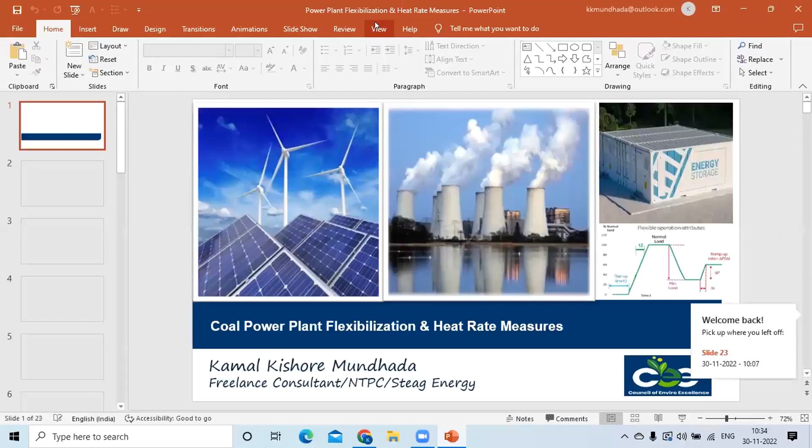Once again, good morning to all my colleagues. As Mr. Prabhat Vermaji rightly pointed out, India's power scenario, particularly the power generating company scenario, is at the cusp of transformation. We have a commitment for climate change, and for this commitment we are adding renewable power at a rapid pace, particularly solar and wind power. As this power is not available 24/7 round the clock, and as our gas resources and hydro resources are limited, while storage at commercial scale is yet to emerge, the brunt of this renewable capacity addition needs to be borne by the coal power plants.

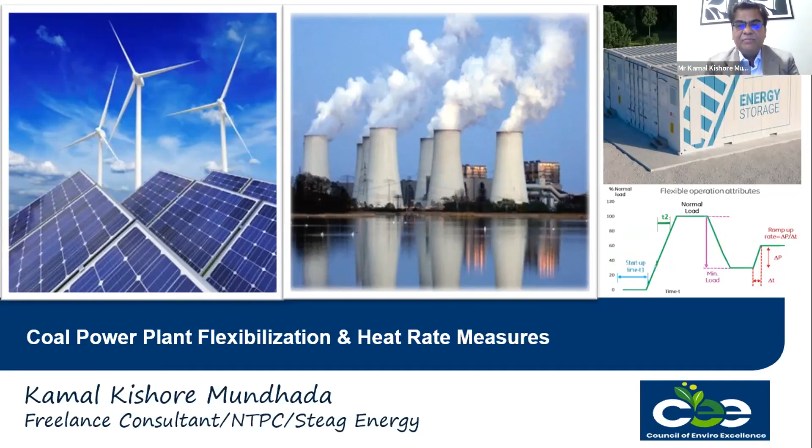And this is where the role of flexible operation of coal power plants comes in. Coal power plant flexible operation has two aspects: one is technical and another is commercial, and we will discuss both. My presentation will cover the country's present and future power scenario, then the urgency and trigger for coal power plant flexible operation, followed by concepts and challenges of flexible operation. As a prerequisite, the country has already undergone some test runs and trial runs at some power plants, and we have case studies. We will see major observations and recommendations from these case studies, then the way forward for flexibilization, and finally the commercial aspects and heat rate measures we can take for power plant flexible operation.

If we see India's present power scenario, the installed capacity is 408 gigawatts, out of which bulk of the capacity is still coal plant, which is 210 gigawatts, almost 51.5% of present installed capacity. But from a generation point of view, renewable, particularly wind and solar, comes to almost 12%, which is the actual figure as of September this year. Even this 12% figure is very significant, because power from renewable is not available round the clock. For a very limited period of the day, season, or year, this power is available, so this figure is very significant.

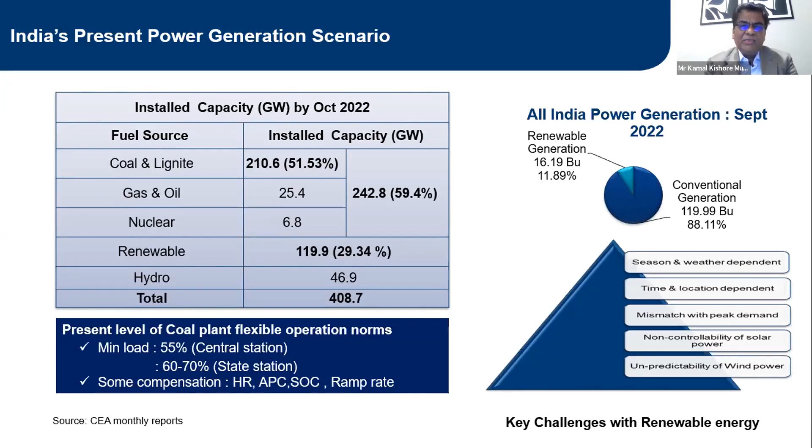If we extrapolate this scenario for the future, then we know that due to the climatic change commitment, we are having the world's largest RE energy expansion plan, that is 500 gigawatt till 2030, with a share of non-fossil fuel of 50%.

What will be the future scenario? The future scenario is provided by the CEA in its draft National Electricity Plan, and as per them, by the year 2026-27, our country's peak demand requirement will be 272 gigawatt, and to meet this demand, we shall require a total installed capacity of 623 gigawatt, with a share of almost 265 gigawatt of thermal, and renewable 332 gigawatt.

So here you can see the RE capacity surpassing the thermal capacity. And if you see the requirement by 2031-32, the peak power required will be 363 gigawatt, and for that the installed capacity requirement will be 866 gigawatt.

And here the thermal capacity will be increased to 274, which will be only 31.6% of the total installed capacity, while there will be a big jump in RE capacity, and it will almost go to 569.4 gigawatt. But one interesting thing to note is that battery storage is expected to be commercially available only post 2026-27. And still there is an apprehension that this power will be costly.

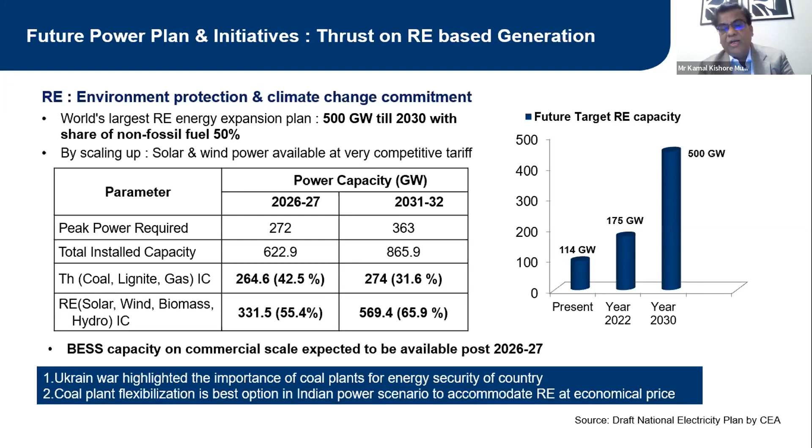And since it is for coal plants, flexibilization seems to be the best option in the power scenario to accommodate the RE at an economical price.

This graph was projected some years back, when it was assumed that we will add 175 gigawatt by the year 2022. But since there was some slack in the capacity addition, it is still very relevant that in the near future this condition will come when we're meeting a demand of 171 to 190 gigawatt in a day, then we will have a peak of almost 108 gigawatt or so from our renewable power.

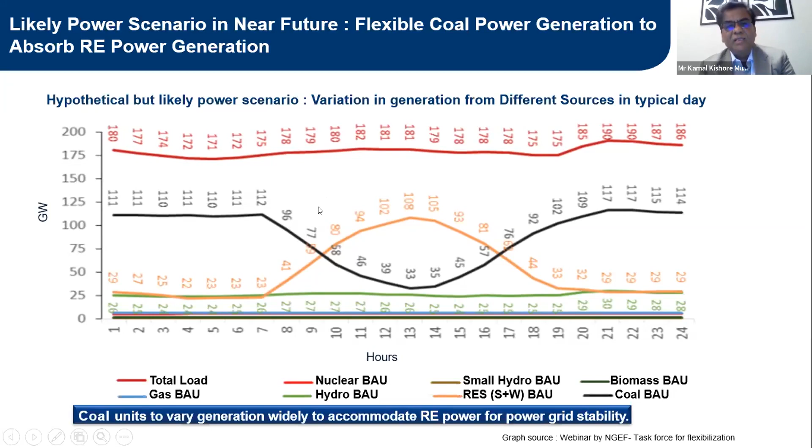And to accommodate this power in the grid, our coal plants need to back down to the level of one-third. So this is the emerging scenario, and this is the urgency of understanding flexible operation for a coal plant.

So realizing this scenario in the near future, CEA has come out with a draft notification, which is still in draft form, and the final notification is expected next month with some fine tuning. As per this draft, load dispatch centers shall schedule all coal plants at a minimum load of 55% within 1 year. Please note, presently, other than NTPC plants, most plants are operating at a minimum load beyond this level. And the ramp rate required shall be 3% per minute above the minimum load, against a present rate of nearly 1%.

And for supercritical, it will be 5% per minute. But after 3 years, the load dispatch center will schedule all power plants to a minimum possible load of 40%, subject to them having undergone some modification. But these modifications are further subjected to technical feasibility studies in consultation with either the OEMs or some qualified consultant.

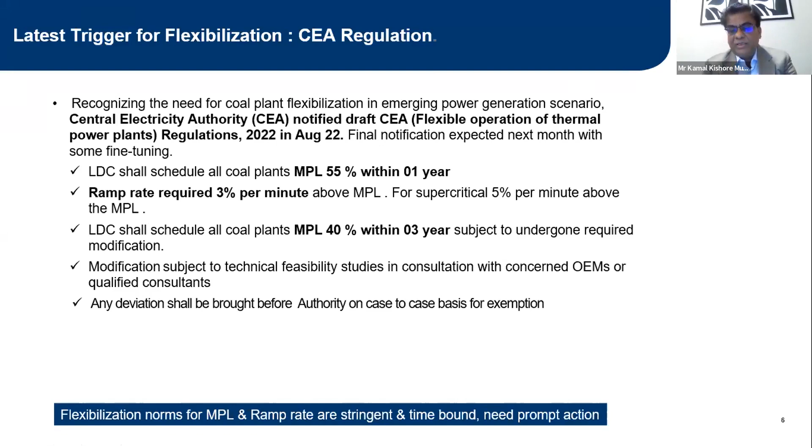So let us now define flexibilization. There are many definitions of flexibilization. Even one is provided by EPRI. But if you want to see flexibilization in a practical sense, then we can say that during load variation in the power plant, it is the extent to which coal generation can be increased or reduced reliably and repeatedly for few minutes to several hours at a faster rate, and speedy startup when required.

Here are a few important words. Extent of generation, extent to which coal generation can be increased or reduced, that is finding a minimum load. Again, it should be a reliable operation.

Again, it should be a repeated process, and it can run for a few minutes to several hours at a faster rate, and startup time also is now a matter of concern. So when we see flexible operation, there are three attributes: minimum possible load, a faster ramp rate, and a unit startup or shutdown time.

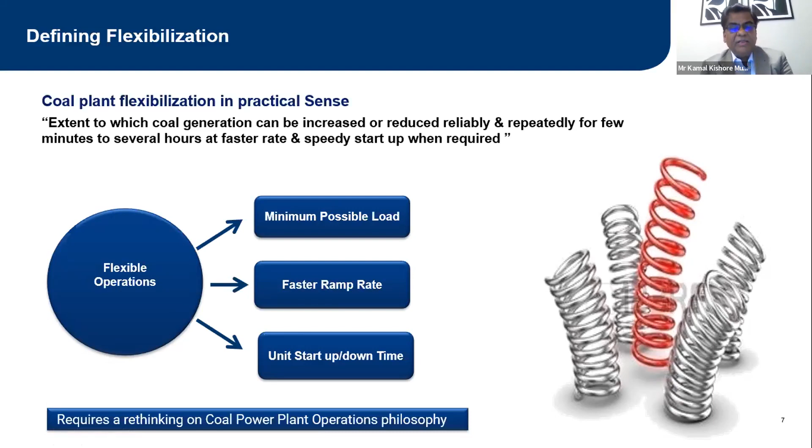So we can say that this present era of coal plant operation is very stringent. So we require a rethinking on coal power plant operation philosophy.

If we further break down the attributes in the requirement of flexible operation, we can find 7 requirements. First is stable operation particularly at minimum unit load. Then, since we are varying the generation, there should be unit reliability at wide load variation. This ramp rate up and down must be at a faster rate. There will be higher startup, shutdown, and load cycles, and we will need start, shutdown time and cost reduction measures.

And again, this flexible operation will cause some problems with environment norms, so meeting stringent environment norms will be essential. Last but not least is cost-effective flexible operation.

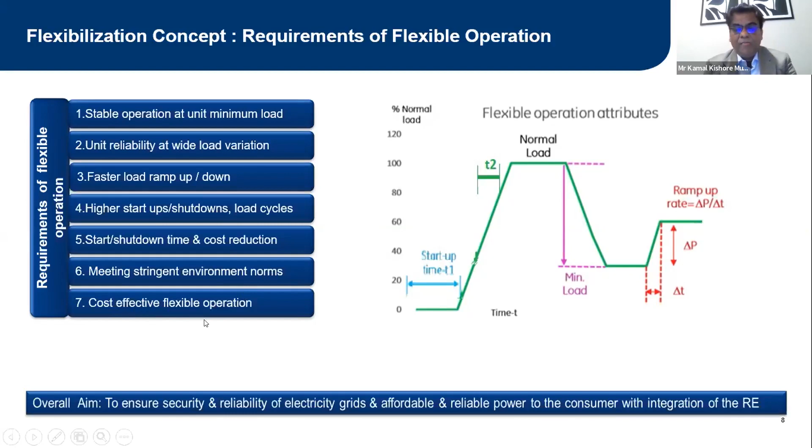So let us understand what can be the impact of flexible operation. As we know, the impact of flexible operation will be more frequent load changes due to cyclic operation, more frequent minimum load operation, faster load ramping causing thermal stresses, more startups, and ultimately reduced plant efficiency due to part load operation.

Due to this impact of flexible operation, there may likely be some long-term damage. It is feared that it will lead to increased equipment breakdown, mechanical failure particularly due to creep and fatigue, and stress failures like boiler thick wall components.

It will increase boiler tube leakage and thermal shocks, particularly in economizer and superheater headers. It can lead to fatigue failures, particularly in turbine rotors, due to cyclic operation, and there can be dissolved gas infiltration in the boiler causing corrosion. There can be a possibility of oxide scale carryover causing turbine blade erosion, and all this will lead to consuming the life of plant components, resulting in lower residual life and high R&M cost.

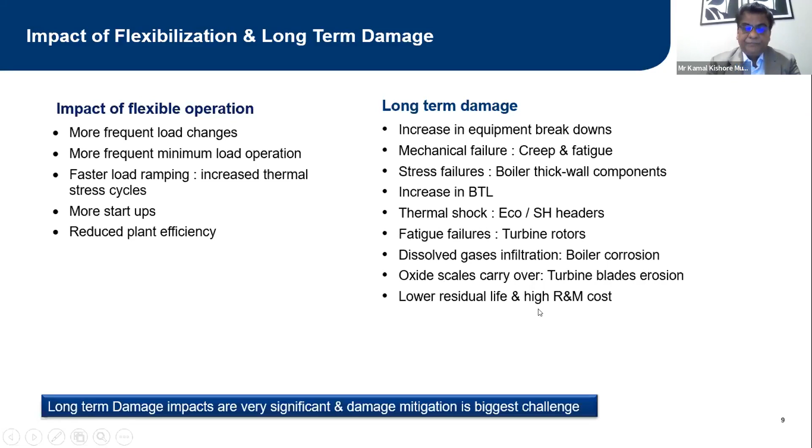So since the last 4 to 5 years, a number of feasibility studies, flexibility studies and tests were carried out at NTPC plants and other plants like NTPC Dadri, Mouda, Gujarat Electricity, Ukai plant, Maithon plant, and Andal plant.

The purpose of the study was to identify process and control system limitations for flexible operation, and second, to identify retrofits for the plant which are required and techno-commercially possible for flexible operation. In all such studies and tests, it was successfully demonstrated on a 500 megawatt unit minimum load operation at 40% load, that is 200 megawatt, and even a ramp rate of 1% and 3% was achieved.

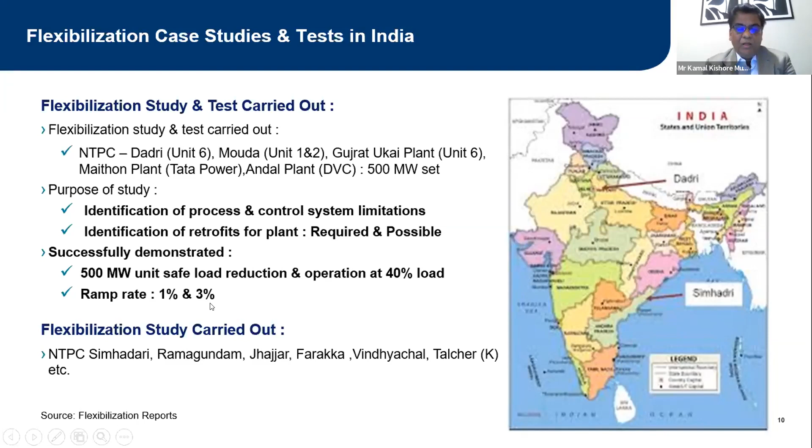So if you see the major observations during this flexible operation case study, the load reduction steps were in 5 steps: 420 megawatt, 330 megawatt, 280 megawatt, 230 megawatt, and 200 megawatt.

And almost at each stage, control loops were fine-tuned at an intermediate load, and minimum load of 40% was run with minimum 3 coal mill operation, and the sliding pressure mode was fine-tuned to avoid steaming in the economizer. The HRH steam temperature was found to be maintaining low, and there was some disturbance in the feed water and drum level, as the BFP recirculation valve was of the on-off type and not a modulating type.

And it was found again at minimum load that the coal flow variation is there among the coal pipes, and again the flame intensity variation was found at load fluctuation. And again, it was a part load operation. At minimum load operation, it was found that the flue gas temperature was below the acid dew point.

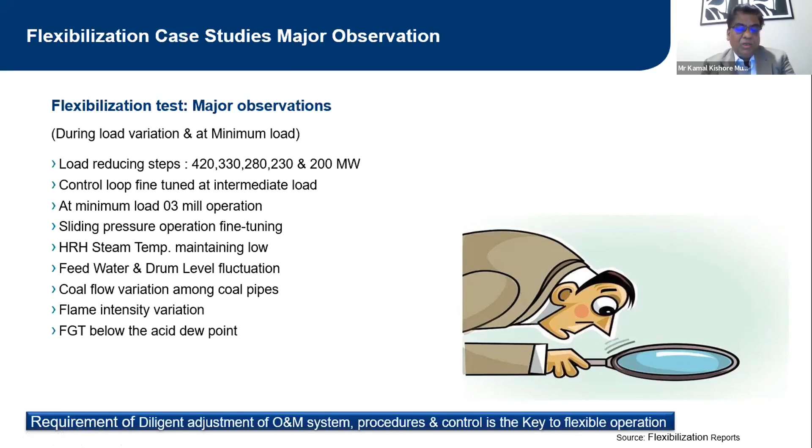After the detailed deliberation on the flexible trial run of flexibilization, there was a recommendation for sustained flexible operation on both the software and the hardware. For the software, there was a need for CMC fine-tuning, including the subloops, as most power plants are designed for base load operation.

So when we want to go to a lower load, this CMC fine-tuning, including the subloop fine-tuning, is required. Another need was felt for a mill scheduler, so that mill can be taken on and off on auto. Online coal analyzer for control and monitoring was felt, as our Indian coal is of poor quality. Moreover, we are using multiple sources of coal in most power plants.

Again, auto start of the unit, fans and the pump was suggested, and modulating type BFP recirculation valve and boiler protection healthiness at low load operation was suggested. Optionally, it was suggested that online coal flow measurement through each coal pipe and turbine blade vibration monitoring was suggested.

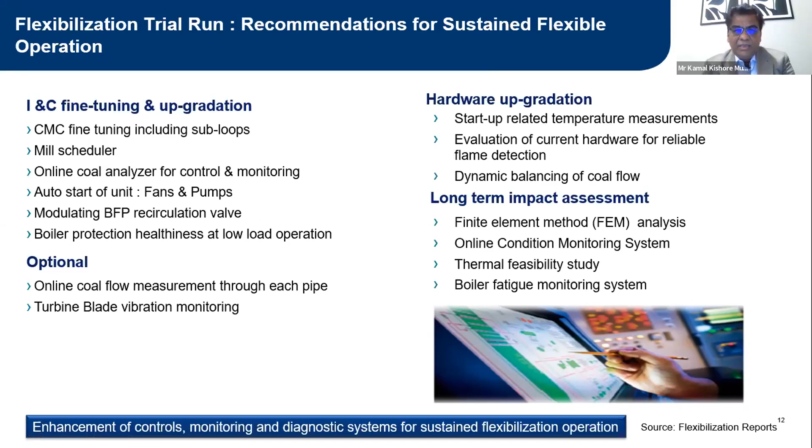So now the next question comes: from where to begin, how to achieve the flexible operation. First and foremost is understanding the need of the flexible operation. Awareness needs to be created among all our operation and maintenance staff, and proper training needs to be provided before going forward.

Second important step is analysis of the status of the present unit by using historical data, best practice we are following, and best practice followed by other power plants, and what procedure mode optimization we can do. Particularly here, the boiler combustion stability and control loop response at load variation and minimum load are very important.

Then we need to go for a test run under strict supervision for minimum load operation, startup test, and cyclic run at a faster rate. After conducting the test, analysis of the plant performance during the test needs to be made, and we need to identify the bottlenecks if we go for flexible operation repeatedly.

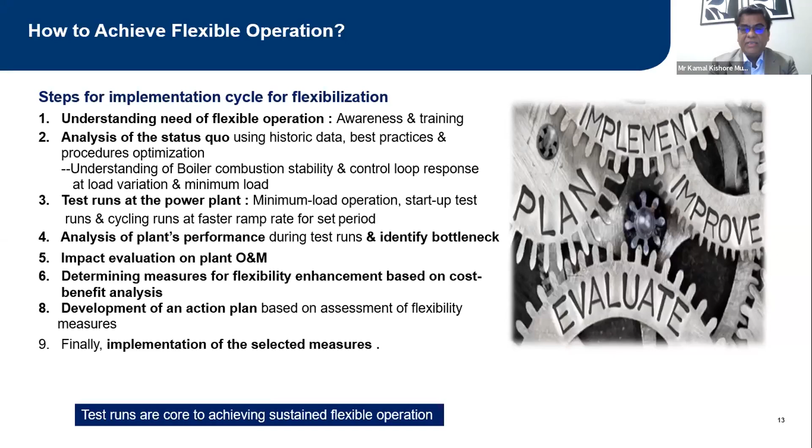So first and foremost, as I have told, revisiting the O&M practices for minimizing the cycle damage is a must. So we need to see how we can modify some of the startup, shutdown, and ramping procedures to lower the component fatigue stresses.

How we can make judicious use of HP-LP bypass as done in some of the European countries. And we need to adopt some of the advanced chemistry monitoring systems. Again, due to the cyclic operation, we need to revisit our maintenance philosophy around the extent of cyclic components.

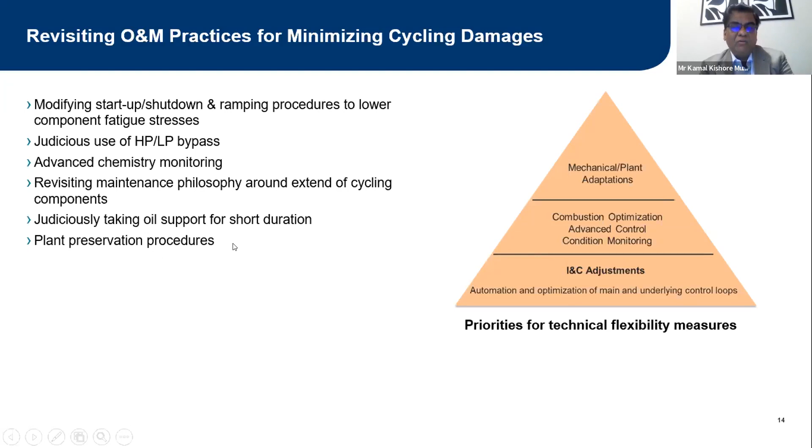As far as the unit startup time optimization is concerned, there are some measures we can take. First and foremost, we need to monitor closely each startup, and we need to do a gap analysis for time taken to achieve each milestone of unit startup. And we need to evaluate this with respect to the OEM norms and the best achieved so far by us.

Again, taking the SCAPH into service, irrespective of the weather, is recommended to get preheated secondary air and primary air. Again, the deaerator pegging is a must to provide preheated feed water to the boiler, and both the SCAPH and the deaerator will shorten the startup time to some extent.

There is always a dilemma when taking the first mill into service, because we need to ensure our HP-LP bypass charge remains charged to protect the reheater, and there must be sufficient flue gas temperature at the economizer outlet. So how we can speed up taking the first mill into service is very important.

Automatic unit startup to overcome the operator's dilemma is very important. We need to ensure the startup-related temperature transmitter integrity, replace any faulty ones, and optimize the set point without compromising unit safety.

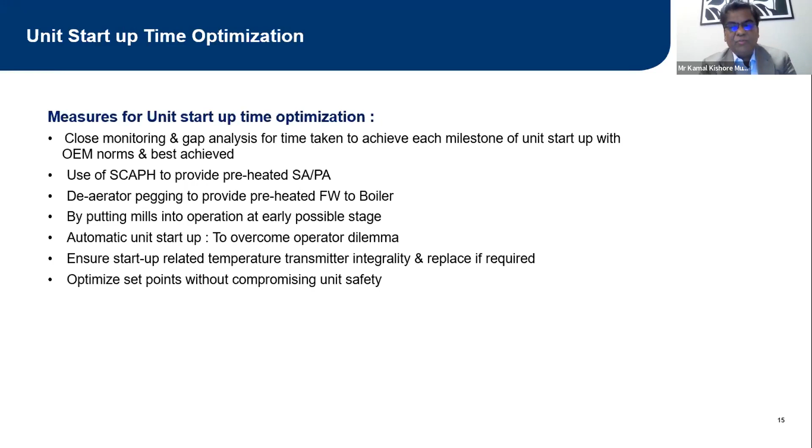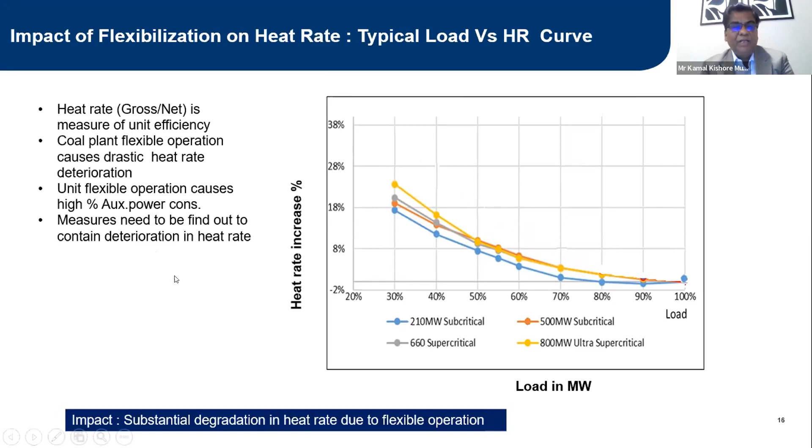Moreover, unit flexible operation results in a high percentage of auxiliary power consumption, and measures need to be taken to contain the deterioration in the heat rate.

When we talk about flexibilization and heat rate measures, the first thing that comes to mind is boiler combustion optimization. This is a key requirement for unit stable operation at minimum load, for load variation, and for maintaining boiler efficiency.

So how do we look for boiler combustion optimization? Since most plants fire multiple sources of coal, understanding the coal characteristics and their constraints, particularly the VM and moisture, is very important. We need to fine tune our SADC operation continuously as per the fuel and unit load.

Since excess air plays a major role in boiler efficiency and stability, we need some offline grid measurement at a particular frequency. Moreover, CO monitoring online will guide us toward better combustion optimization.

Coal mill optimization plays a very vital role in combustion optimization, particularly if we can attain better coal fineness and mill outlet temperature as permissible by the fuel. If we can optimize the PA flow through the mill and get uniform coal-air distribution, then we can get better boiler combustion.

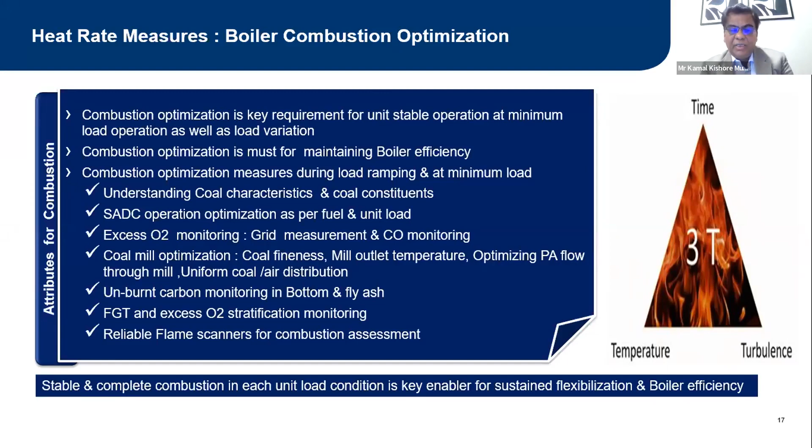Unburned carbon monitoring is very vital, because this reflects poor combustion, and monitoring and addressing the issue will help us achieve better boiler combustion. Flue gas temperature and excess O2 stratification give us an idea of problems in the boiler, so addressing them is important, along with a reliable flame scanner for combustion assessment. Stable and complete combustion at each unit load condition is a key enabler for sustained flexibilization and boiler efficiency.

Another important thing is coal mill number optimization. As we know, if running at part load, particularly minimum load like 50, less than 55%, or up to 40%, if we run more mills, then our PA flow increases and we compromise on secondary air flow and windbox pressure. This can lead to flame stability problems and mostly inefficient boiler operation, so reducing mills at minimum load is very important.

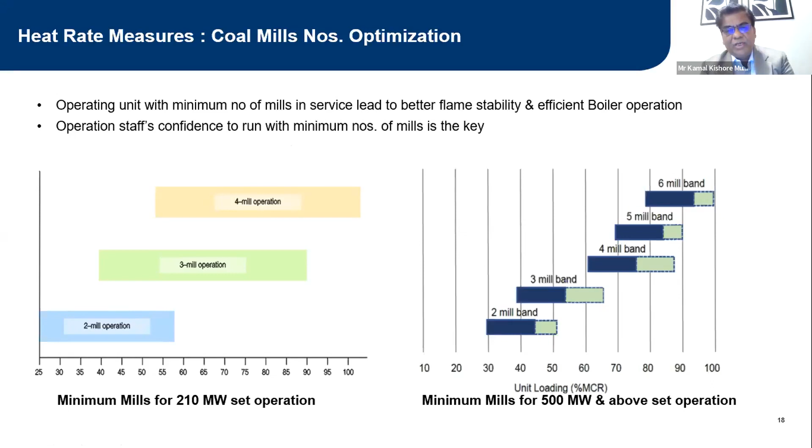There may be hesitation on the part of the boiler operation engineer to reduce the mill, but they need to be educated and trained to take this decision.

Again, maintaining superheater and reheater temperatures is very vital. Here two measures are important: using the top burner during part load operations, and judicious operation of burner tilt.

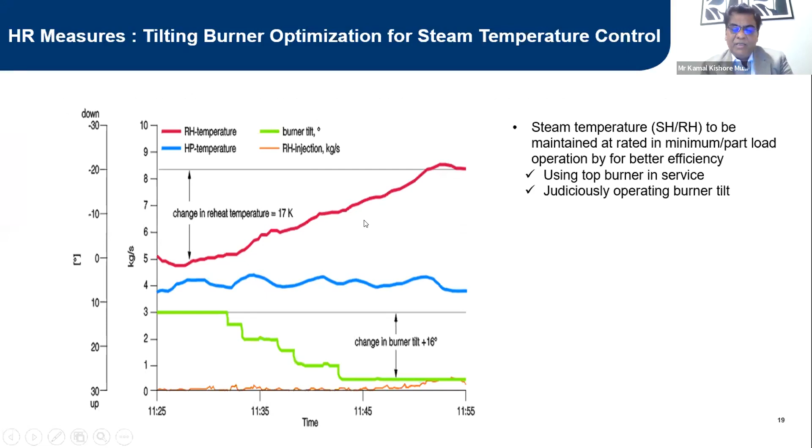It was also found that sliding pressure operation gives us a better heat rate, with about a 50 kilocalorie improvement in sliding pressure operation. This needs to be taken care of, but may need some fine tuning to avoid other problems.

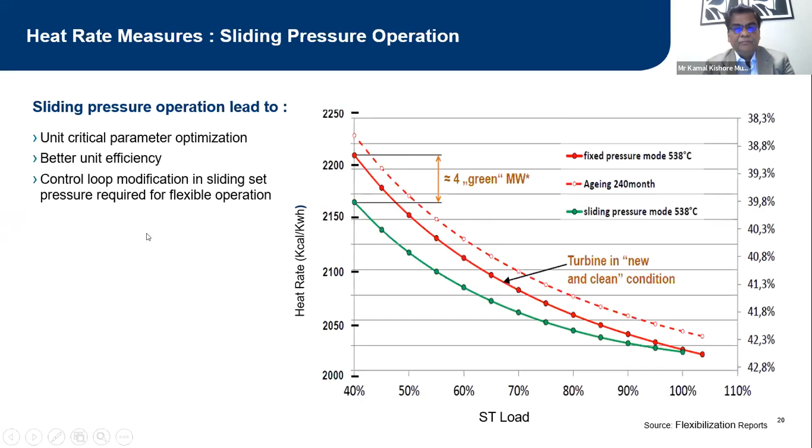When we talk about the net heat rate, minimizing the unit auxiliary consumption is very vital. This means single stream auxiliary operation, particularly the single ID fan, FD fan, PA fan, CEP, BFP, and minimum number of mills, are very important, particularly when we are running the machine below 50%. There should be no hesitation on part of boiler operation to go below the bare minimum number of coal mills.

This is required from the point of boiler stability as well as reducing auxiliary power consumption. When we go for sliding pressure operation, it reduces BFP auxiliary power consumption, which also helps in reduction of auxiliary power. Provision of VFD on auxiliaries, as per cost benefit analysis, is a must. So single stream auxiliary operation is a must to contain net heat rate deterioration, but auxiliary reliability is a key issue for efficiency management at part load operation.

Operation staff must have assurance of auxiliary reliability.

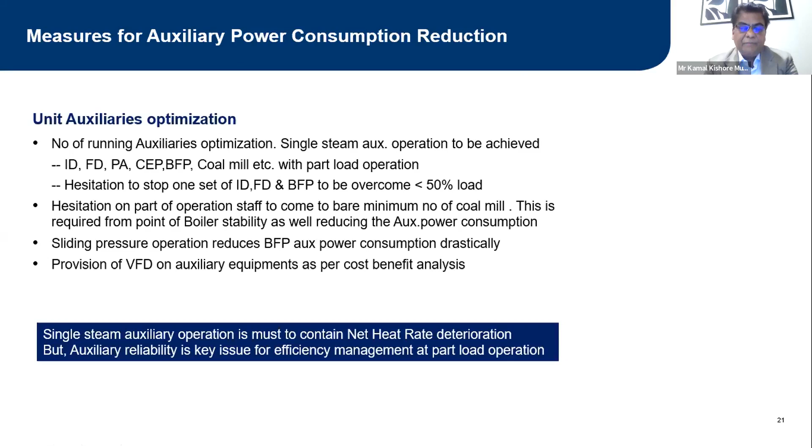So at the end, we can conclude that the rapid growth of renewables necessitates coal plant flexible operation. Control loop fine-tuning, boiler combustion optimization, and O&M practice modification are prerequisites for coal plant flexible operation, and well-calibrated trial runs for flexible operation are core to achieving flexibilization.

We need to explore suitable retrofitting options on a case-to-case basis for each station based on technical combustion study. Heat rate improvement measures such as combustion optimization, superheater and reheater temperature control, and sliding pressure operation are vital for sustainable technical commercial flexible operation.

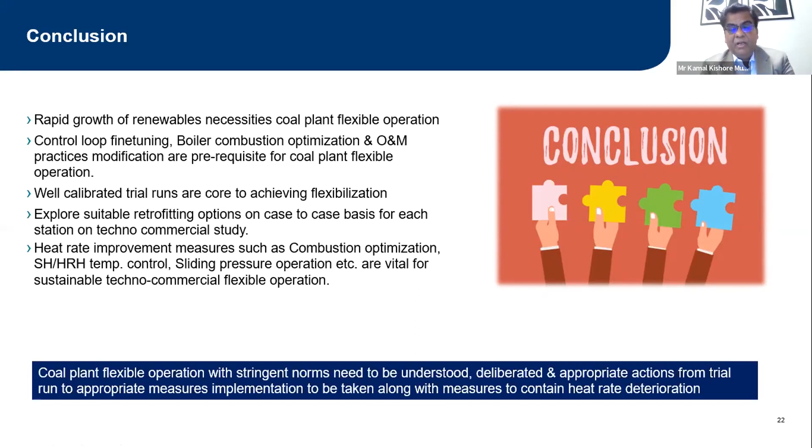Finally, we can conclude that coal plant flexible operation with the stringent norms needs to be understood, deliberated, and appropriate measures need to be taken up and implemented, along with measures to contain heat rate deterioration. That's all.

Flexibilization is a subject being discussed widely, both by Indian agencies and internationally, and I feel it's a topic that is very relevant and important. But running plants in flexible operation is a challenge because these plants were never designed, and by virtue of their characteristics, are not designed for ramping up and down so fast and frequently. You shared that the ramp rate should be 3%, and even talking about technical minimum, CEA is thinking about asking everybody, our load dispatch centers, to be at 55%. So maintaining the flame at low load is a challenge because these boilers were never designed for it. So I have two questions. One is about our existing installed base. We have two types of boilers: subcritical with drum, and supercritical. So as per your experience and knowledge, which boiler, if we have to pick and choose, is best suited for flexible operation, ensuring there are not much failures and most of the parameters are kept in control? So this is my first question: which boiler is more suited for flexible operation?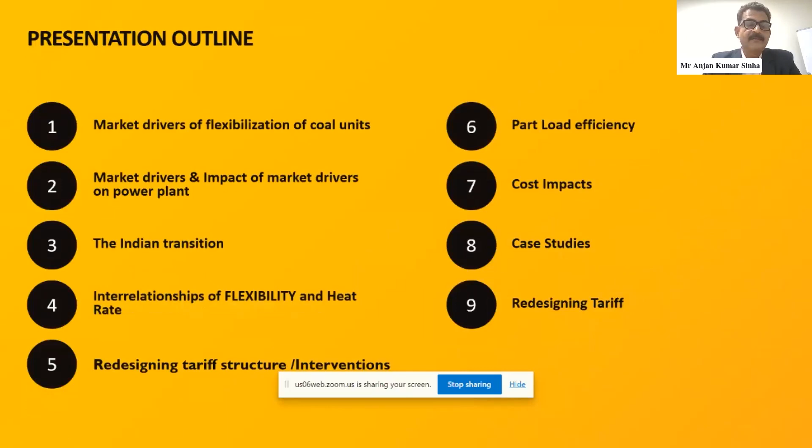Just an introduction about my company. I'm with Intertek. Intertek is a company founded in 1978 -- actually earlier it was Aptech -- and this company has a rich heritage. It was originally founded by Sir Thomas Edison long back, and today we operate in 109 countries with an employee strength of 46,000, and we have a number of research labs. We partner with various research organizations. We are a major partner of EPRI, and we work on various things from asset integrity to being the leaders in cost of cycling. I think today we are the only one who provides actual numbers on cost of cycling.

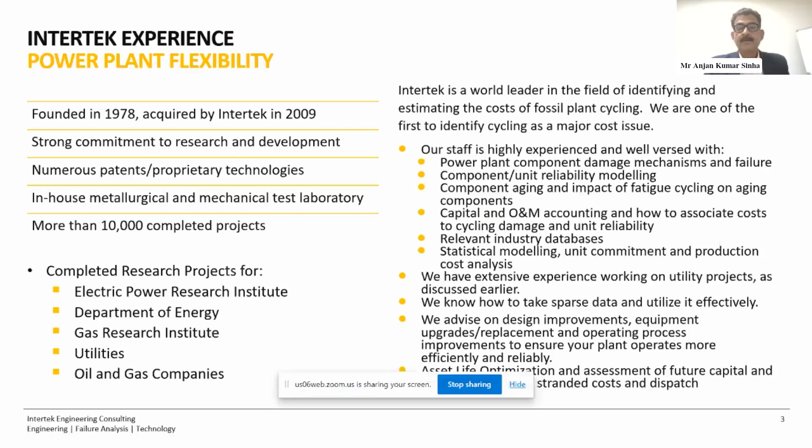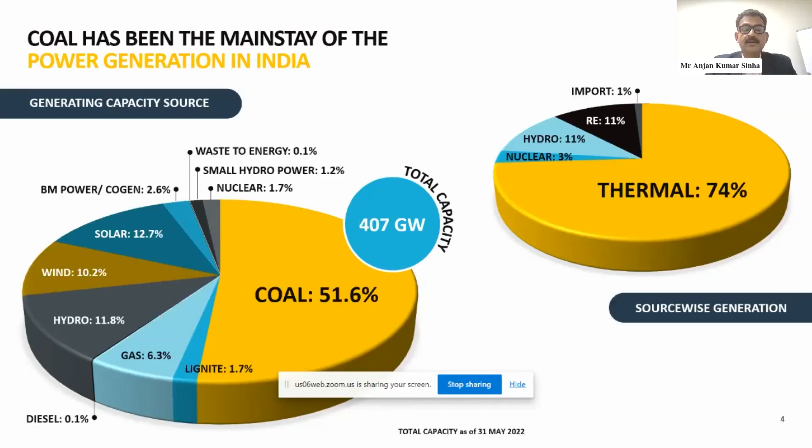So just a brief: today, coal with a capacity share of 51.6% generates more than 70% of power; the 74% number is coal plus gas, and gas is very low. This just shows that coal is the mainstay of power generation in India, and it will remain so. Even by 2030, it is projected that 50% of our generation will come from coal. So everything will be dependent on coal in the Indian context, because we lack other resources -- gas could have been a better option for flexible operation, and hydro, most of our projects are run-of-the-river, with very few storage-type hydro plants.

So the Indian transition is a huge one. You must all be aware that 500 gigawatts by 2030 is not a very easy goal, so all stakeholders need to work together. While it's being claimed that our PLF has been coming down, if you look at 21, there was a certain rise because of a rise in demand post-COVID recovery. And now the government is seriously thinking of adding more coal capacity, because with 500 gigawatts, more of this capacity will be needed.

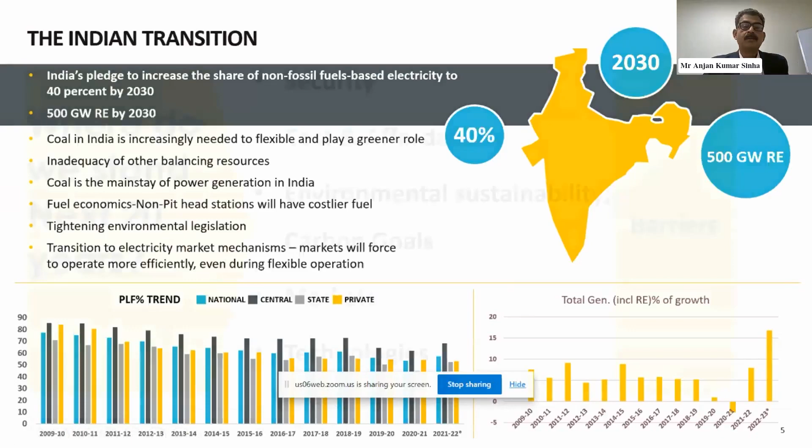And this coal will play a much greener role in the coming years. It's not like dirty coal and whatever people call it, but this integration of 500 gigawatt through coal means coal has to do all this greening act. Otherwise, forget about this RTC, round the clock power from renewable 500 gigawatts.

Energy security, affordability, and environmental friendliness mean sustainability. These three things we call the energy trilemma. But if we see the next 20 years, security will be number one then also. It has always been a concern. Then comes cost and environmental factors. We always think of that, but if it comes at the cost of energy security, we have to rethink, and we are rethinking today. Then we have our own carbon goals.

Market is also evolving along with the technologies, and there are a lot of barriers. I'll discuss some of them, which we need to overcome. So on coal also, this is very important for your GDP growth, for renewable push, then even for the growth of the non-regulated sector.

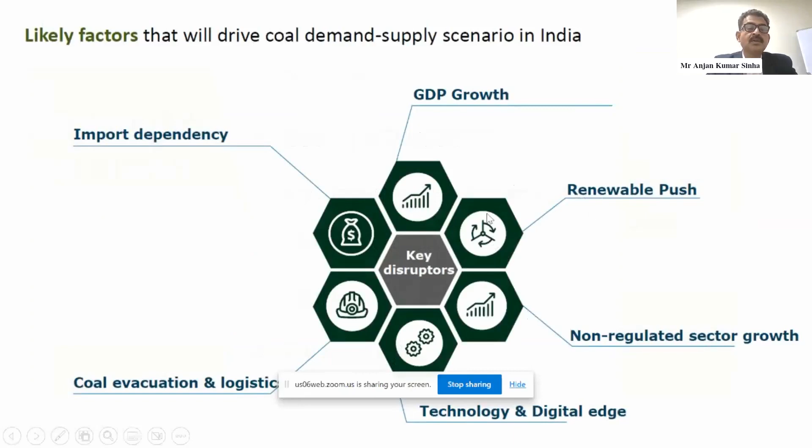So this was a study done long back, in 2019. Today, this is being done with 500 gigawatt. This study was with 175 gigawatt. So you see the requirement.

If you see here, if you are able to see my cursor, this is the RE, solar plus wind. So in the afternoon, it will be around 108 gigawatt. From morning, minimum is say 28 gigawatt. So coal, mostly this is coal generation. This is the main dispatchable power. So we get this way we have to operate.

And there will be many units which will be required to operate on various modes, whether it is low load operation or ramping. Ramping you need when you are coming down in the afternoon and again in the evening peak. And in the evening peak, if you see, the demand also rises. So that adds up to the use of this coal generation.

While there will be some plants which will be required to run even on two shifting, there will be some on weekly shifting mode.

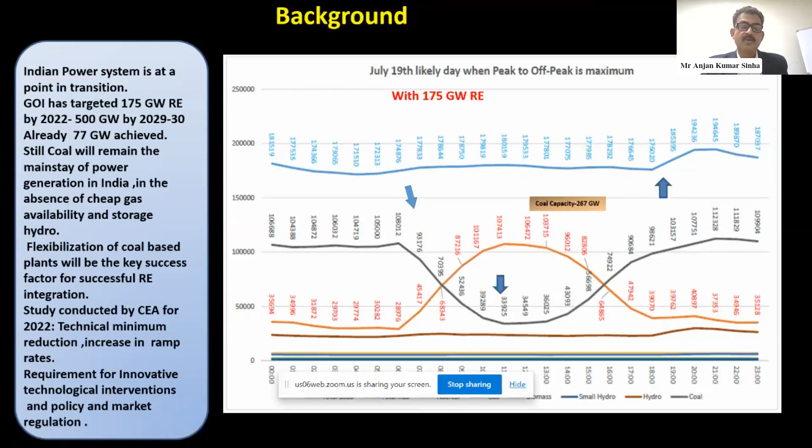Now, what really is flexible operation? There is still a lack of understanding in the sector. People still have to understand what flexible operation is. Very honestly, we had a workshop some 15-20 days back. There also we discussed this, and people only think that, okay, minimum load operation or startup, but all these operations, it's flexible operation.

Like load following, then significant load following or mild load following, then minimum load operation. Then even if you operate units above 100%, meaning 105%, just to meet the requirement of the grid, that is also flexible operation.

When you shut down the units and keep them under shutdown condition, this is called extended layup, wet layup or dry layup, whatever you want to call it. Dry layup is here. So if you don't do it properly, there's a cost. You consume your life and your unit gets affected. You lose in terms of life consumption, in terms of reliability, in terms of heat rate performance. Your auxiliary will consume more power. So all those issues need to be checked.

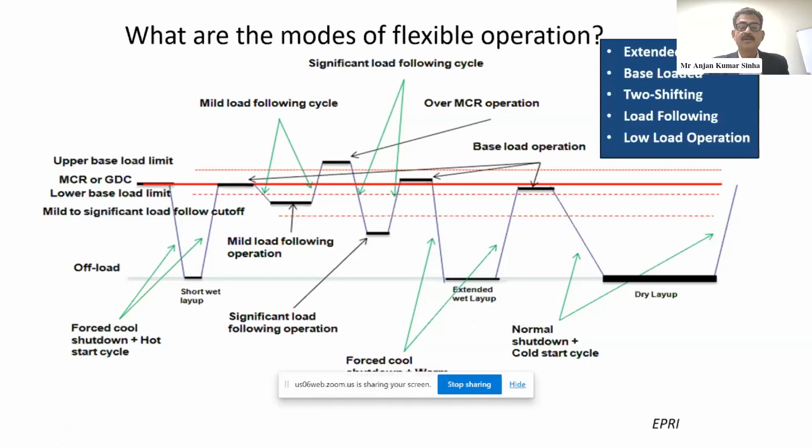See, the test run was only a small part of what we did. It's not that you do that and you automatically become flexible. There are many more things which are required to be done.

So market drivers, very briefly, I'll cover. Transitions, renewable transition, this will drive the market, then falling renewable cost. See, at any moment of time, a consumer will buy the cheapest power. This is the economic rule.

And he'll think about other things later on, even the environment, about emissions. But if you're getting something cheaper in terms of money, you get that first. So renewable cost has come even below coal. But people don't consider the cost of this integration. When you take that into account, it will be much more. But this is one area where the regulators need to work.

Then increasing requirements of ancillary services, DSM, AGC. AGC is also driving your flexibility, because to meet this AGC, you are running your units on flexible mode. Then your fuel economics is also driving the flexibility.

You know, your non-pithead stations, no matter how efficient they are, will have to stop, will have to go under reserve shutdown, as is happening, because the cost of coal is too high and you are not in the merit order. You are very low in the merit order.

Environmental norms, at times, may require you to reduce your generation or stop your units. Then market mechanisms - there will be a time when the market will start calling the shots and will decide how your units should operate.

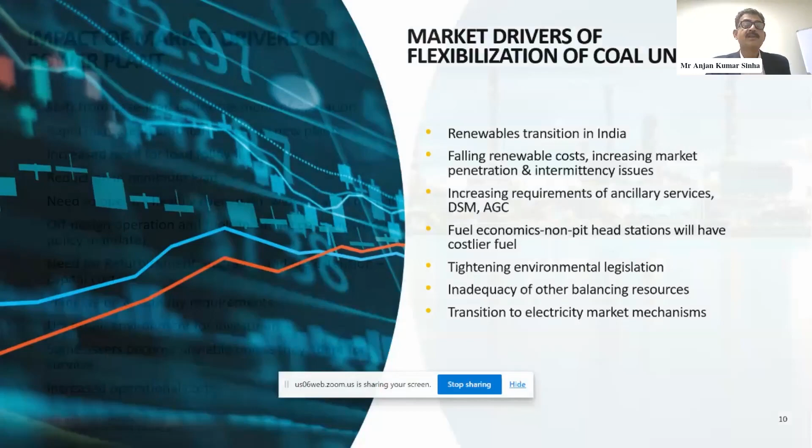The impact: base load will be a thing of the past, at least for most of the stations, not all. There will be a rapid increase in startups, need for load following, and minimum load level needs to be reduced because many state gencos and many generators say they won't be able to go below 60% or 70%. But what they don't understand is that shutting down units and starting again is much more costly than actually running on minimum load. I'll show the numbers also.

Off-design operation means your units were not designed for that, but you'll require to run them that way. Then you need to spend on refurbishment, on retrofits, plant layup. Many utilities are not practicing a proper layup procedure because they are not required to stop the units for long periods. But it will be a very costly thing unless they start investing in preservation systems.

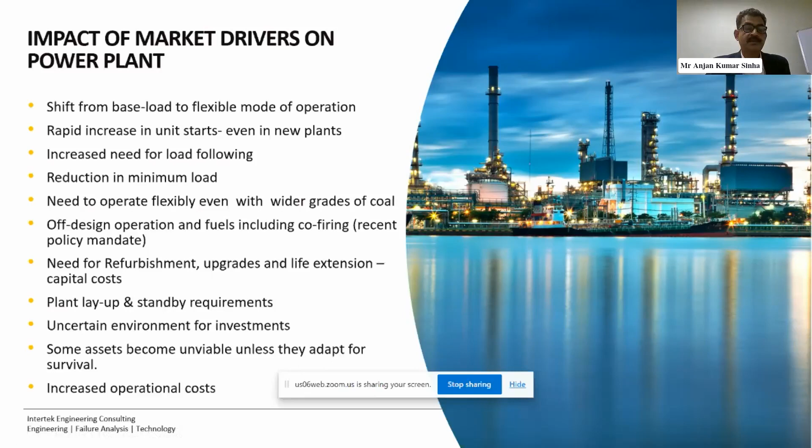Then operational cost will increase with flexible operation.

There is an interrelationship between flexible operation and heat rate. Boiler losses are all known, but when you change your load, these losses increase manifold. There are other factors also. Coal is definitely one big factor — coal quality, the moisture in the coal — because moisture imposes a huge penalty on your heat rate.

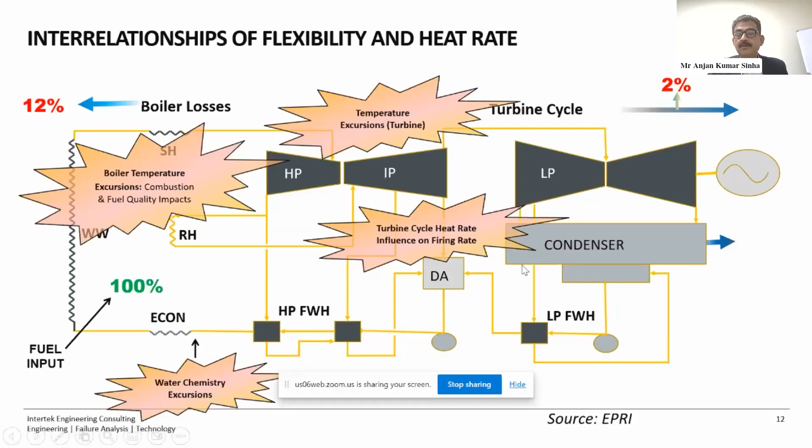Then even on the turbine, your condensate system. I think some of these things were discussed already, so I won't repeat.

Then, flexible operation's effect on heat rate. The parameters are: your firing rate, even the health of your mills, how you optimize it, what air-fuel ratio you maintain, and end of the day, what kind of combustion you maintain, even the fineness of the coal. All these influence the superheater spray you put into your system. If you're not operating your burner tilt properly, you put in more spray, and that affects your heat rate.

Then there are deposits in the boiler, so heat transfer is hindered in those areas because it acts as insulation. Even your chemistry practices and oxygen ingress in the system, if not controlled, have a huge impact — we had recommended, and even NTPC had this recommendation, of installing nitrogen blanketing in the CST tanks, so that oxygen ingress into your water system gets reduced.

Water wall circulation, then whether you are operating on sliding pressure or modified sliding pressure — sliding pressure operation is very important. I'll show you a curve on the effect of operating on sliding pressure versus fixed pressure. But there are issues with sliding pressure on your boiler, especially on the water walls — issues like DNB, heat transfer, and the health of your tubes. That's why when you modify it, you need to trade off between fixed and sliding pressure.

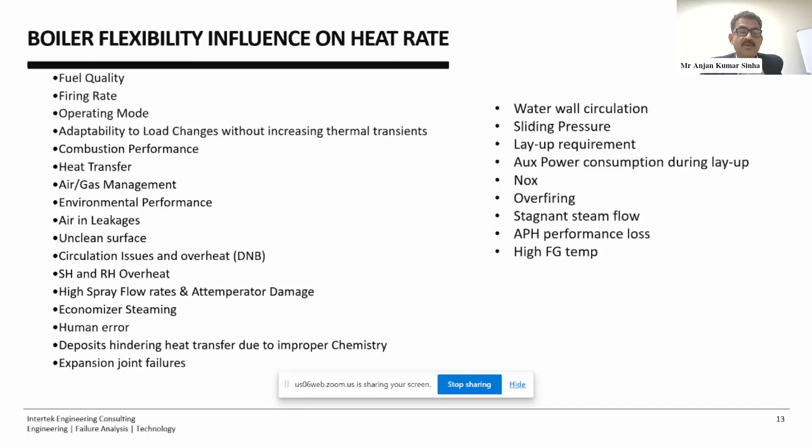I've seen many OEMs putting advanced control systems on these units, and it's not successful in many cases — at least some units I know of — because the system isn't meant for taking that advanced control. It's like taking an old Ambassador car and putting in a Mercedes or Rolls-Royce engine and control system — it won't become a Rolls-Royce. For that, you have to retrofit and change some components.

How do you define flexibility? Before you start, you must have your KPIs. KPIs definitely include minimum load, ramp rate, and startup. Then how do you measure and how would you quantify? You control only and manage only what you can measure. What you cannot measure, you won't be able to control or manage.

Even with respect to the utilities, the system operators, and the policymakers, all must have KPIs, all must have their metrics. One metric we have is the merit order in India, which is based on variable cost. So that also needs a revision.

Because many times you see these inefficient plants, which are situated at the pit head, get scheduled over the efficient plants which are non-pit head, simply because the merit order system is based on variable cost. So we have been telling the regulators to look into this, maybe to put some carbon pricing, because at the end of the day we all need to ensure reduction in emissions.

Even for the compensation mechanism, what I was saying, you don't have your metrics in place. So what do you incentivize, what do you compensate? So all those utilities really need to work on this.

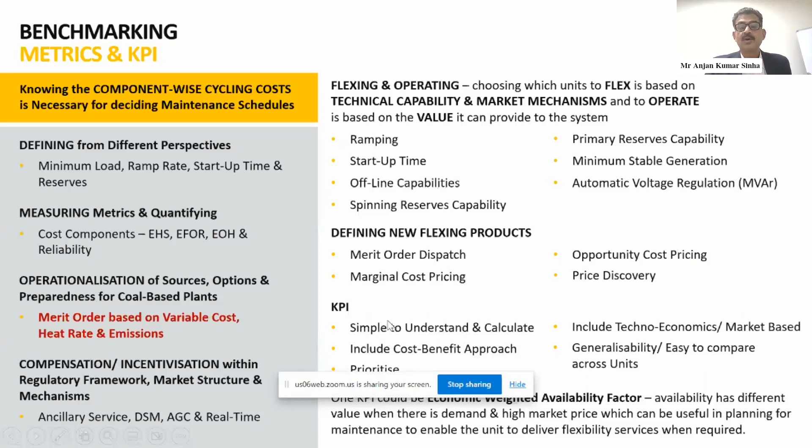And then I'll show you one thing. There's a system called economic weighted availability factor. We have availability factor today, based on which you even get your fixed cost. But availability is not the same, it doesn't have the same meaning for everybody. Because when you are ready, when your power is needed most, that has a greater value than being available when your power is not needed. So we have devised a KPI, economic weighted availability factor. It was discussed a lot at an EPRI conference, where all the international utilities were present. So all those things need to be looked into.

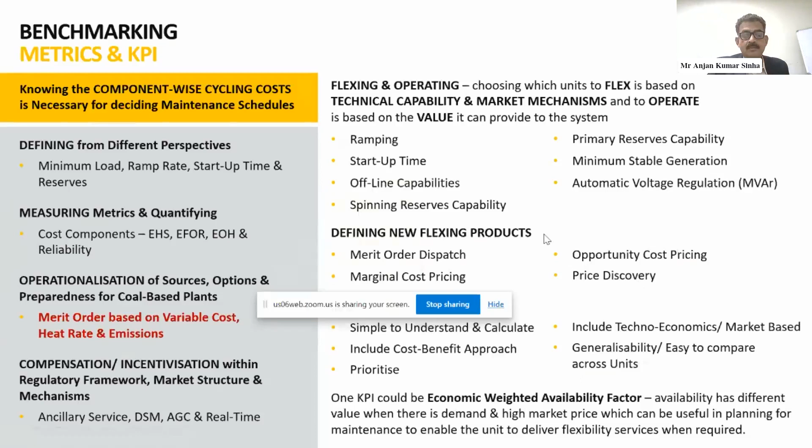Coming to combustion optimization, a lot of things have been done and people are doing work, but you need to start with combustion optimization. Unfortunately, one measurement I haven't seen anywhere in India is furnace exit gas temperature. This is the only indication of what is happening in your furnace, whether your combustion is getting completed.

I'll tell you one very interesting thing. I visited three stations this year where I found a serious flaw in what fineness was being reported versus what the actual fineness was. You normally send some laborers or unskilled workers to take the samples. Even in your lab, it's done by unskilled workers, while people just sit in the office. What is actually being done, you are not aware of.

And this is the most important parameter for your combustion. Even when your airflow is not maintained, if you put in more air in your mills, you'll get bad fineness, so that is also important. At the end of the day, your coal fineness will indicate things like proper airflow and other parameters in the mills. There are a lot of parameters.

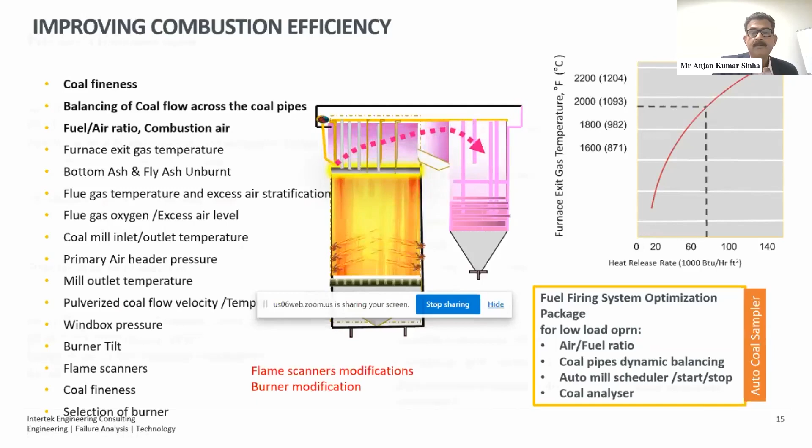So how would you optimize airflow and air leakage management? Check all your areas—this is a big one. People working in the plants are well aware of what is required to be done in air leakage management, whether it's your expansion bellows or any leaking points.

Then furnace exit gas temperature management. First of all, you need to install instruments for this. If you don't have them, you can also do offline measurements—you need to procure instruments for that. For O2 measurement, it must be a representative sample where you measure; that's very important. There must be a grid—one measurement immediately after the furnace, then at certain points. Just economizer inlet or air heater outlet may not give you accurate results, and you end up not optimizing your airflow.

Optimizing your mills, keeping the right number of mills in service. In a test run, one of the biggest things we did was reduce the number of mills in service. At 40% load, we kept 3 mills with a coal quality of around 3000 GCV. If the GCV is higher, you may require only 2 mills at 40%.

So these are some of the things, and some solutions are recommended—combustion optimizer, an online solution, mill auto scheduler, and online coal analyzer.

This is very important because stations are getting different coal qualities—there's wide variation, and that's the biggest challenge today. If you have an online coal analyzer, that will help a lot. Operators will know what they're getting and can optimize accordingly. Even your control system, if it has the right feeding of GCV, the control will be much better. But people are not installing this deliberately, let me tell you bluntly, because it has other repercussions—if somebody tells your coal quality very accurately, then you can have other issues. That is the precise reason people haven't installed it today. But this will be of great help.

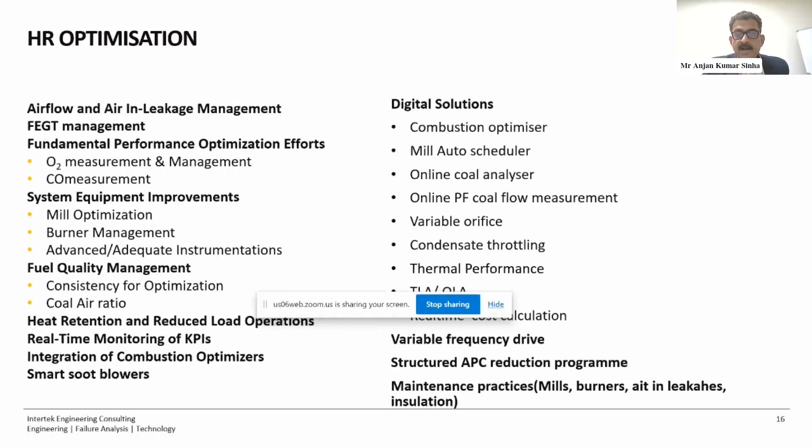Then, have a structured APC reduction program in the station, and it has to be gradual—not a one-shot action. It has to be continuous, comprehensive, and with the involvement of the plant staff. There needs to be a proper structure for flexible operation in the plant, and people have to stay on consistently for some time there.

On technology, I'll skip this. We categorized units based on criteria back in 2019—today some of these parameters may need to be revisited. At that time, we decided that wherever units are getting low grade coal, meaning GCV less than 2800 with low volatile material, these units won't be able to run in flexible mode. So they would only run on base load or maybe 2 shifting, or flexible low load. That was the criteria.

Then certain units on flexible efficiency retrofits—one good thing happened last week. There was an R&M done in one of the units at NTPC Ramagundam, and they got a huge gain in heat rate—10% improvement—on a 40-year-old unit. It's a great thing. So do we really need to retire a 25-year-old plant and put up new investment? Most of these units are in the North Pithead region. I think they'll issue a press release today, so you can read that—it's one of the best things I've seen over the years.

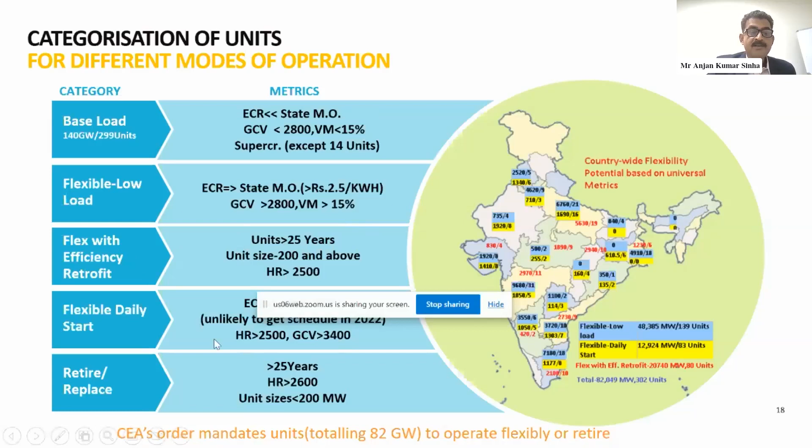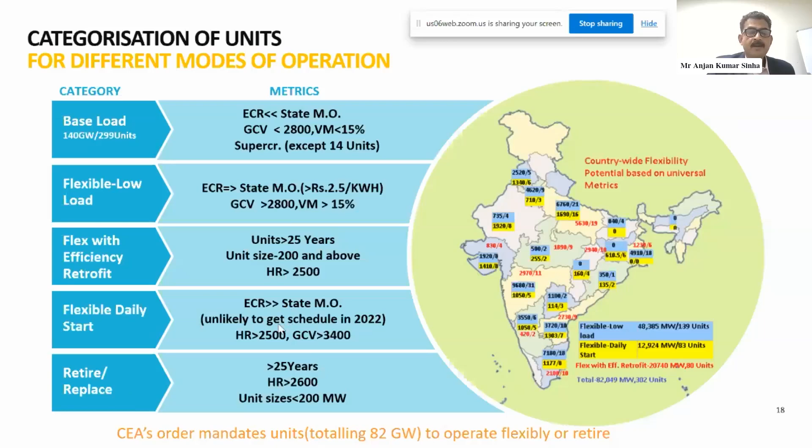Then certain units will go on flexible daily start—it's already happening in Tamil Nadu, with many units starting and stopping daily on a 2-shifting basis. But certain very old units, like we closed down Talcher and Badarpur, will need to retire. This was decided at that point of time, but all of it will be revisited again.

Actually, till 55% CERC is already compensating the ISGS units, but not all states are getting it still. And they haven't even asked their state regulators to compensate them. That is the irony, because I was working for some of the state regulators, I'd given them numbers, some concept notes. One of the states, even the regulator, I presented to the regulator.

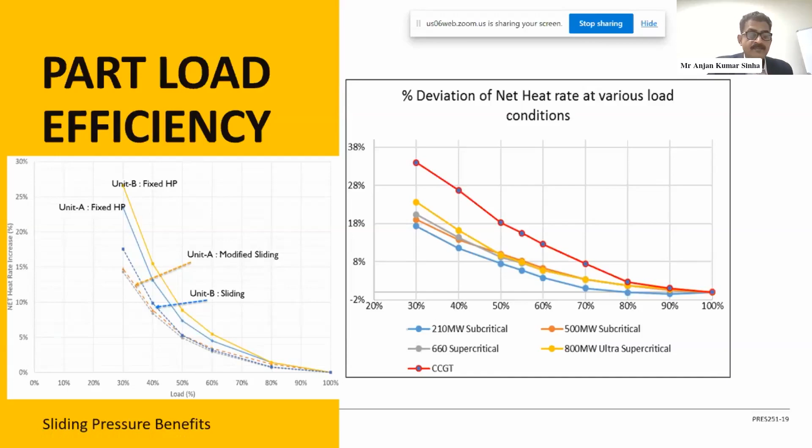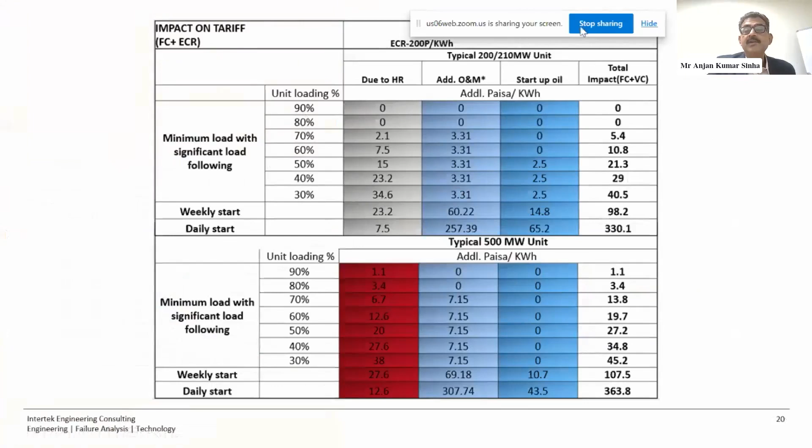So these are the cost numbers. This is due to heat rate. See, different mode of operation - if you are at 90% and then you go down till 30%, so this is your additional cost. Say your ECR is 2 rupees, then you have an additional cost that you incur actually. At 30% it will be 34.6. This is for 200 megawatt and this is for 500 megawatt.

Then additional paisa I put for this, this is for load following cost. And then what is interesting is weekly start and daily start. So if you do a daily start, this will be 7.5 paisa additional heat rate. But your additional O&M, means your damages cost due to maintenance, will be 257, more than your ECR. That is why I say that even if you go to this level, your total cost is only 40 paisa increase. But if you go till this level, 3 rupees 30 paisa, which is better.

So if you are not willing to prepare yourself for any of these levels, 40% or 30%, then you have to do this. It's your choice. Similarly, these are numbers for 500 megawatt.

See, these numbers are accurate, but this will all get changed. This was long back, based on 2017 numbers, and it was based on 10 years of data. We had done it at 4 units - 2 NTPC units and 2 units at a state GENCO. We had analyzed 10 years of their cost data and operation data, then identified which cost is due to flexible operation. We had segregated the fatigue creep cycles, and then these numbers were calculated. This is just to show in terms of ECR, but the numbers are separate.

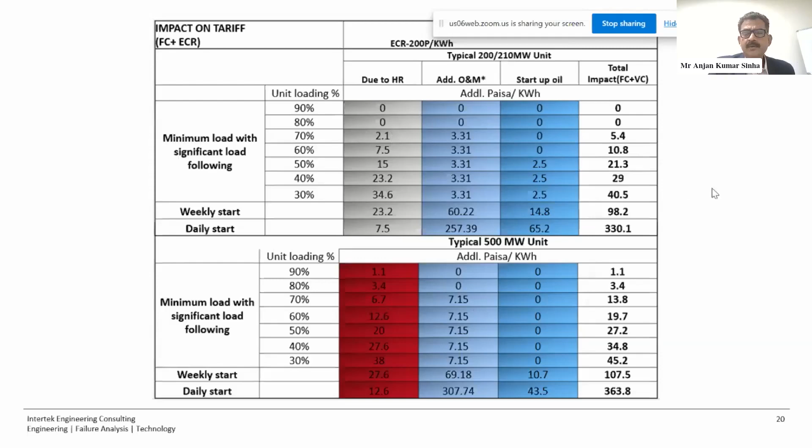So this is the number I'll tell you - this is cost per each event. Typically for 210 megawatt, one significant load following - I'd shown you in the second slide what significant load following is - is 50,000 INR. With this, it's almost negligible. A significant load following is 2.7 lakhs.

Each significant load following you make, you incur this cost - you damage your machines this much. And from here it goes on increasing, and when you do a cold start, it is 262 lakhs.

That number won't be the same for every unit, to tell you, because even the solutions won't be same for every unit - there is nothing like one fit for all solution. It will depend on your unit design, on your vintage, on the historical operation, how you have operated your units in the past, the coal you are feeding, the coal quality, and a lot of other parameters.

So this is just to show you that it is always better to operate in this mode at low load rather than incurring this cost, and you are not being compensated for this, and neither does somebody even know this cost. I was discussing this with one of the directors of a company.

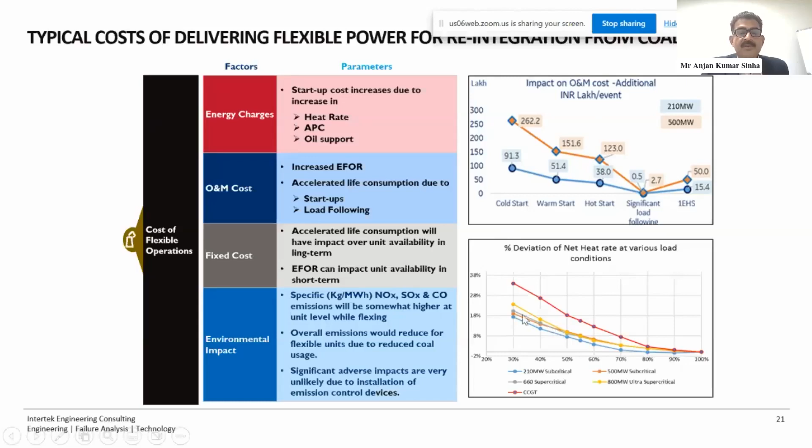So this compensation which is already there, is different. We have asked CERC for these numbers till 40%. This is from one of the reports of CERC - they had put it for discussion long back, but didn't get suitable feedback, because even the numbers on efficiency loss, people don't come up with these figures.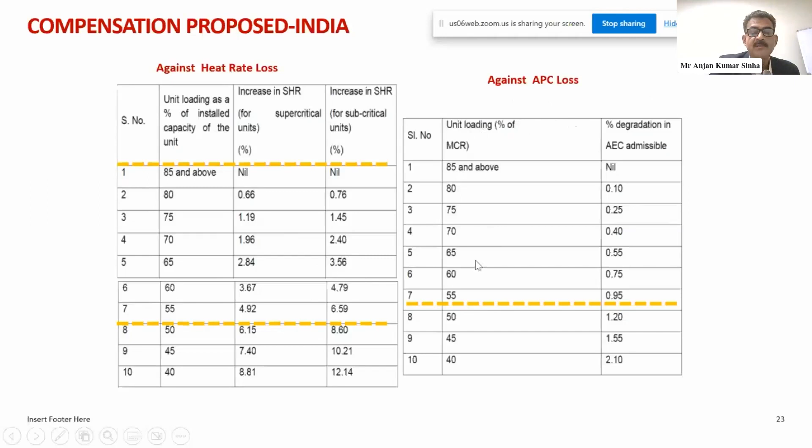So prepare it for your own units, and then some studies I'll cover. When you want to do your test run, there's a test procedure available - a 50 page document detailing it step by step yourself.

Then a brief on what we had done in India. Globally, we have done a lot of things with NREL, cycling cost benefit analysis, for 200 stations. Then power plant cycling cost - this document is available in the public domain. Just search power plant cycling cost.

So we worked with EPRI. We provided this effect of flexible operation on boiler components, theory and practice. There are 3 volumes, and 1 volume is available free of cost. Others are paid - you have to purchase from EPRI. And these are some of the things we are doing in India.

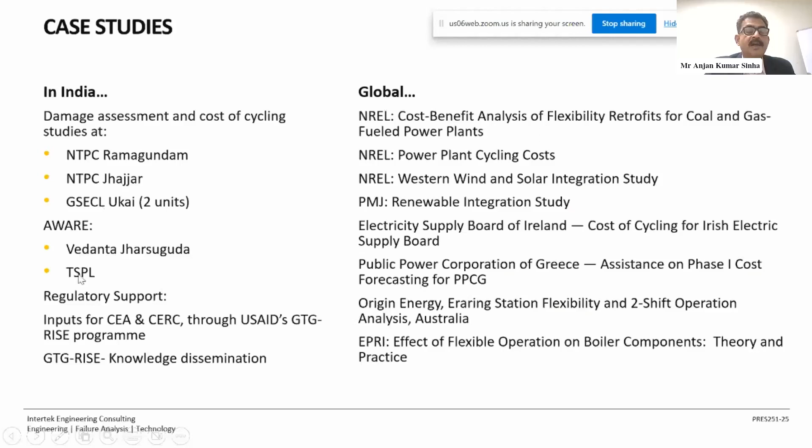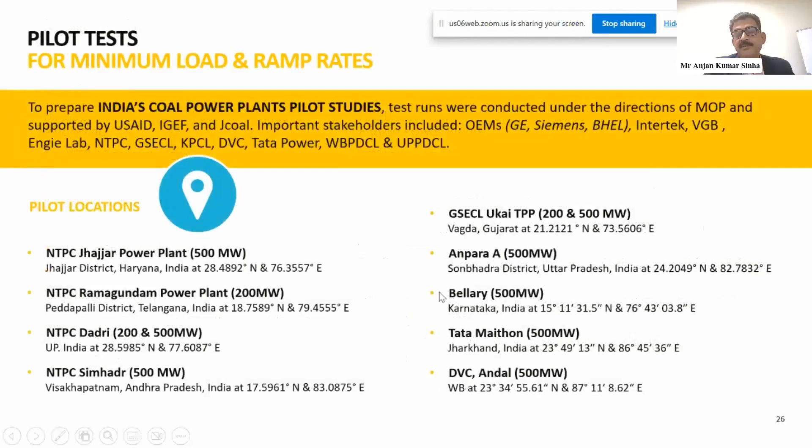This is the past. Again, presently there's a software going on in Vedanta and TSPL. These are the pilot locations. Latest one is DVC Andal - we did that with Siemens.

The common learning we had is, ramp rate - there's a wide confusion. People talk about 3% ramp rate, but you need to understand what actually ramp rate is. 0 to 100% won't be an average ramp rate. What people in policy, even system operators, understand is from how many more minutes you will take. It's very interesting, this is going on.

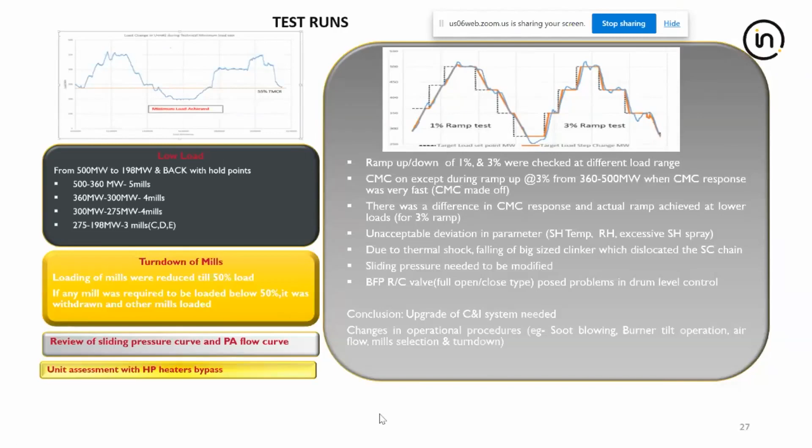See, this I can continue for a whole day, or I can end here also. No, please don't end here, but try to share the most important things, so that we want to have the privilege of asking questions to you. So if you can conclude.

Yes, I think this is done. Oh, okay. Okay. Right. Yeah.

Thank you, sir. Thank you so much for a great presentation. A lot of information, and we know you have done extensive work on it, both from your previous employer NTPC, as a power professional with EPRI, and now with Intertek. Definitely we are privileged to have you here with us in India, because we are thinking a lot about adding renewables, and power plant flexibilization is going to be the requirement. Thank you so much for sharing a whole lot of data flawlessly. You shared pilot projects, you shared your ongoing projects, you shared projects which you have done in the past. So definitely these are all very, very informative.

We keep hearing both of you in various events, and definitely we will ask questions. But I personally feel flexibilization is a complex subject, and it's again a journey. It's not that you do the modification and fit it and forget it. You have to keep raising your bar as far as O&M is concerned, as far as retrofits are concerned, as far as maintenance is concerned. So all these things going together will ensure that these plants are flexing, coming to the grid, going out of the grid.

So this is a typical schedule I had taken. This is an old slide before COVID. Now the condition is worse.

I'll try to get something on two shifting, what people are actually doing. So this is the 1-day 96 block schedule. See the way that schedule is happening - ramp down 30%, significant load following. And I've shown you the cost numbers, the damage. Again, this way it's happening.

And this unit is not supposed to be flexible. Nobody has told them to prepare for flexibility, but this is the schedule they are actually getting. This is low load operation. Again, they're flexing many times, and suddenly this has a huge impact.

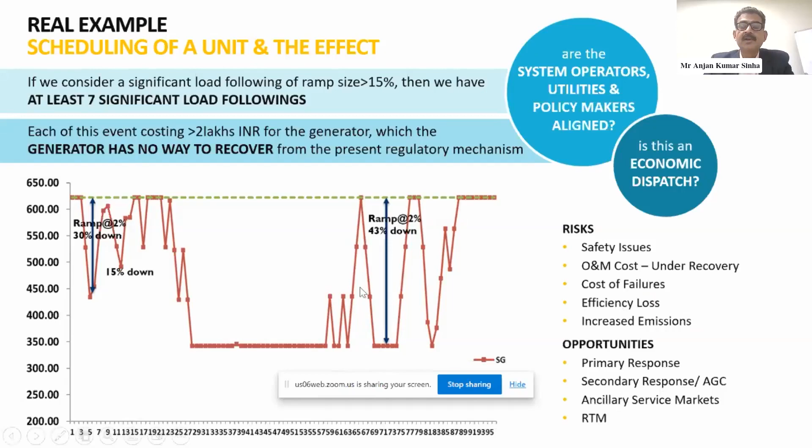And there are issues like safety issues, O&M cost under recovery, failure, efficiency loss. They may be earning money on AGC or other things. But see, there were a number of safety incidents, which people shy away from discussing. I think Vijayawada and some other stations - there were 2 or 3 plants which had failures.

There was one station where we did some studies - I won't name that station. They had bottom ash hopper explosions 17 times. 17 times. Luckily, no fatality had happened in any of the 3 units.

Simply, we went there and changed the operating procedures. Then they got up and told us, no, this is all flexible operation and we have to prepare for this. So either do it willingly or do it at a huge cost - choice is yours, but you have to do it. It will be mandatory for those units which are non-pit head, which are at mid-merit or high or low in the merit order.

So I think this is the answer that you needed, or some more clarity.